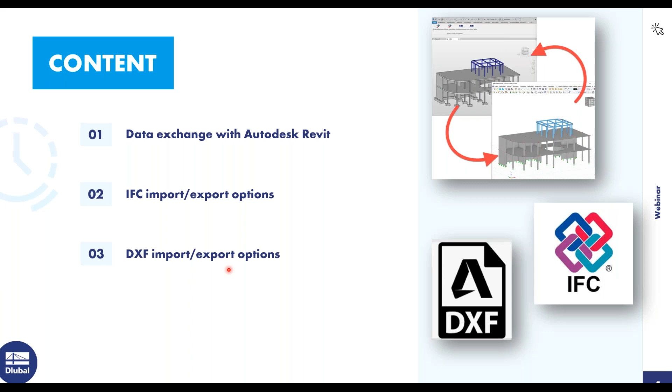So like I said, I would like to start with Revit, but before that, I want to have a closer look at the objects that you can transfer and just some general information on the integration.

Currently we have the interface for Revit 2022, and we're working on Revit 2023. This is planned to be released this month, actually. Both of these releases are set to be our named work in progress versions. What this means is that we haven't fully developed all the features that we want to have yet, but the most important features like import/export are working for the first release.

Currently, this link/transfer requires a web services license, and we plan to make this free in the future. For now, though, if you want to test this out, feel free to get into contact with us, and we will assign you a free web service license to test.

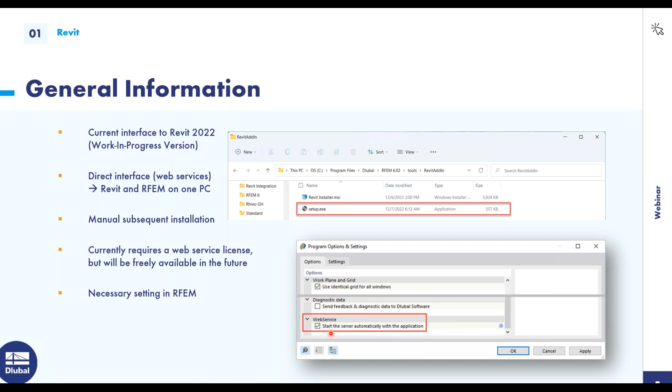At the moment, we are lacking or missing some features like loading. So loads we don't have at the moment - they cannot be transferred over yet, but they are under development and should be released soon.

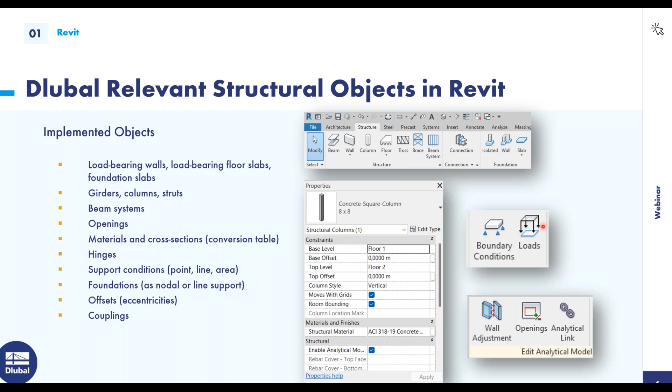Next, I wanted to go over the settings regarding the export. So we can go over those here in the PowerPoint.

Then we have some exporting options here. The first option is to create a new structure, which will create a whole new blank file in RFEM. You can also choose to overwrite an existing structure, which will completely delete the structure in RFEM and overwrite it with the structure from Revit.

Lastly, we have update existing structure, which will just update the items or objects that you've changed in Revit and RFEM. So for example, let's say you first export from Revit to RFEM, then modify the structure in RFEM, and at some point the Revit model gets updated. With this update existing structure option, you can simply update the RFEM model with no need to start all over in RFEM, and then you can save that.

Then there's an additional option: you can overwrite the member releases, but by default we have this turned off. The reason is because we believe the RFEM hinges or member releases have a higher priority. By default, we believe you don't want to overwrite these, simply because we have more options for hinges in RFEM, for example, nonlinearities.

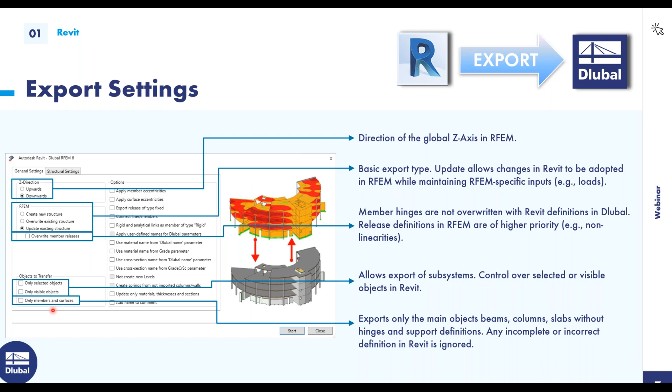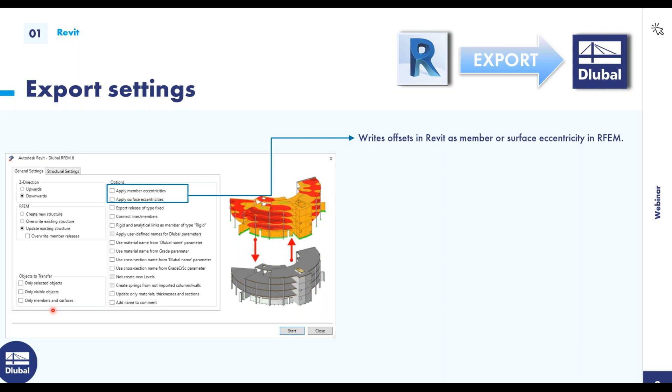Then some more additional options on the right-hand side here. You can choose to export member eccentricities or surface eccentricities. Eccentricities are some calculated distance between the analytical line of a beam or slab, and that distance is to the center of gravity of the physical object. So that's what an eccentricity would be in RFEM.

There are some additional options here that I'm not going to go over live today, but feel free to check out the PDF located in the handouts of this webinar or the recording online to read through these. The yellow highlighted options are still a work in progress and are not implemented yet. Then this add name to comment option - when you export, the material and cross-section names will be automatically placed in the comments of any element in RFEM.

Then there is a second tab called Structural Settings, and this is the last tab in the export settings. Basically what this does is it allows you to convert isolated foundations into nodal or line supports or surfaces with elastic foundations. So this will turn your isolated foundations or wall foundations into either nodal supports, line supports, or surfaces with elastic foundations.

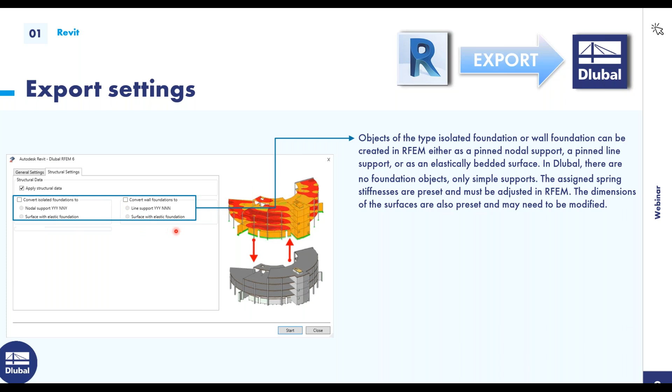Then the next topic is conversion tables. This is a topic that comes up with every exchange between software programs. Materials and section names must be converted between programs because the names don't match up exactly.

And then they are subdivided further by whether you're using regular expressions or not. In case you want to use regular expressions, just a little bit of information on these - regular expressions are like parametric conversions. So for example, instead of mentioning all sections from W shapes, you could write it as a regular expression, and then you don't have to list all of your W shapes. You could simply just write a regular expression for it.

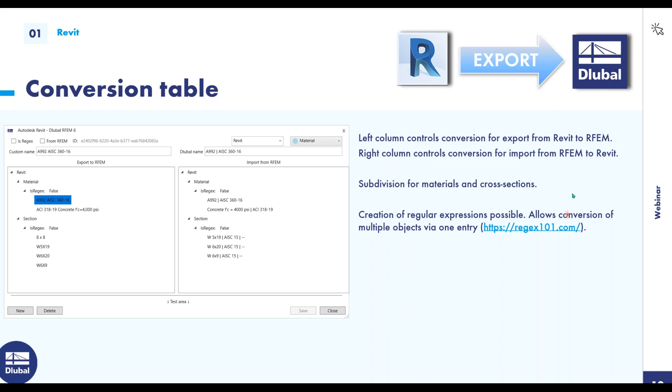The next topic is the Dlubal parameters found in Revit. With this function, you can release or add additional parameters into the analytical properties in Revit. From the 6 that we have listed previously, only 2 of these we have working at the moment. What you can do now is add a parameter for truss type or tension-only type member into the analytical properties of a column or a beam in Revit. This allows you to designate whether a column or beam is a truss or a tension member in Revit, so that during export this can be read by RFEM and assigned to the corresponding members.

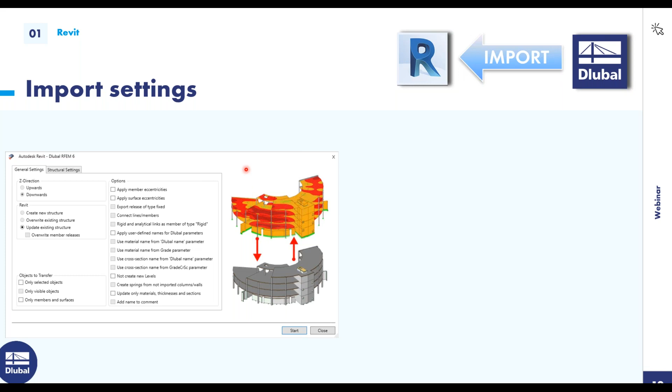The last topic I want to go over before getting into the interface is the import settings. This is the dialog box that'll pop up if you would like to import a model from RFEM into Revit, similar to the export settings dialog box. You can see here we have similar options. The only option available that isn't under the export options is the update existing structure option, so it's only possible to update a Revit project. You cannot overwrite or create a new project.

What this allows you to do is export into RFEM, modify a model in RFEM, and then update the Revit project. Another example is maybe you open an empty Revit project and want to read all the info in from RFEM or RSTAB, and you can do that by updating the project to get all the information from RFEM or RSTAB. Of course, this is only if you make sure you have the correct families preloaded into Revit, as we're not able to actually create new families when importing from RFEM.

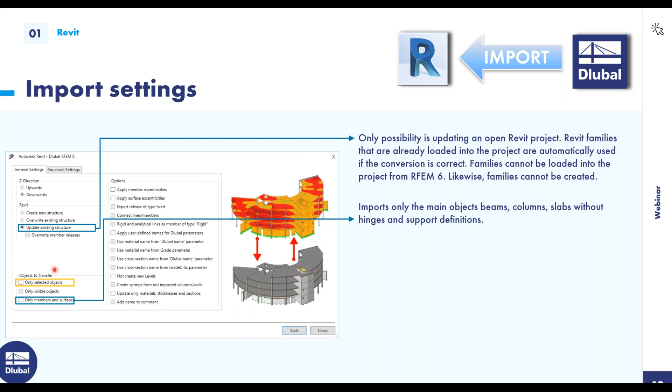There are also some functions for controlling the amount of transfer you do. This would allow you right now to transfer some of the objects. This is still a little bit under construction, but you do have the option to only transfer members and surfaces if you'd like. We have some other options still under construction too, such as the options for eccentricities shown here, which are not available yet.

We have 2 remaining options here. The first is you can check not to create new levels in Revit during the import, and that's available. Then you can also choose to only update materials, thicknesses, and sections. Sometimes this is a safer way of updating projects.

So that is it regarding the theoretical point of view of the interface. Now I'd like to take a look at the actual interface itself, so what we can do is move over to Revit.

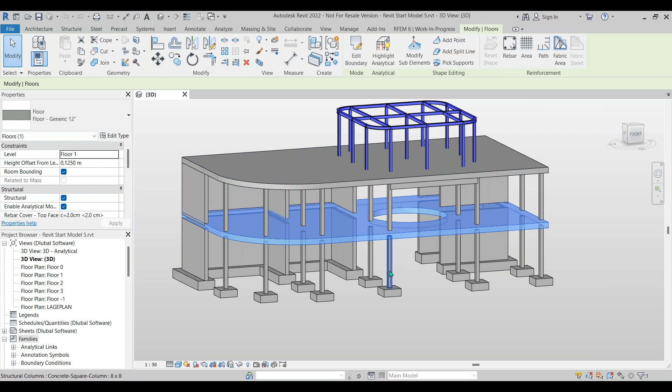Here you should see I have an example open in Revit at the moment. This is a project I previously put together. You can see it is a mixed structure of concrete and steel, maybe some small offices here. We have some concrete walls that are 8-inch, concrete slabs that are 12 inches along with an opening, and concrete columns that are 8 by 8. Then we have this smaller steel structure on top using W sections. So this is a physical representation of a project.

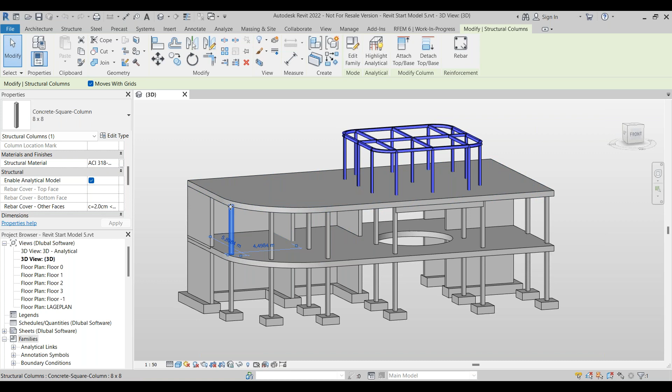What I'm more interested in is the analytical model, because that is what is going to be transferred into RFEM. You may be asking, how do I get this analytical model in Revit? You can get it by checking an option. If I click on one of my elements, say my concrete square column, you can go to the structural properties in this panel, and if you scroll down you'll find an option that says enable analytical model. If you activate this option, which I've done for all the elements here, Revit will convert the 3D objects into lines for columns and beams, and 2D objects for slabs.

So if I'm converting my column into a simple center line that goes up the center of gravity of the column, and then a 2D object for my slab here, which goes at the halfway point of the thickness, then naturally I'm going to have a gap appear between these two lines. So what Revit is doing is not only converting these objects into surfaces and lines, it's also connecting this gap afterwards.

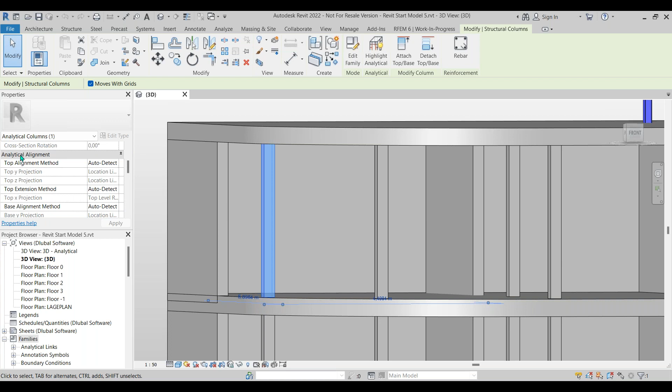If I click on my column here and change it to my analytical properties, and scroll down, you can see the analytical alignment settings are all set to auto detect. This is how Revit automatically detects that. There's also another option in the dropdown. If you hit projection, you can manually set a level for how much you want to shrink or elongate the member or column.

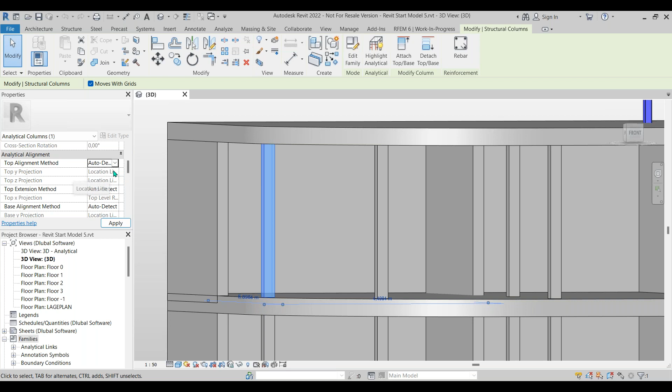This was all done for me already previously. So what I can do now is double click on the analytical 3D model. This is basically what our Revit does. You can see if I rotate the model that all of my columns are connected to my surface and they're all in the correct plane, so lines and surfaces are all connected in the same plane.

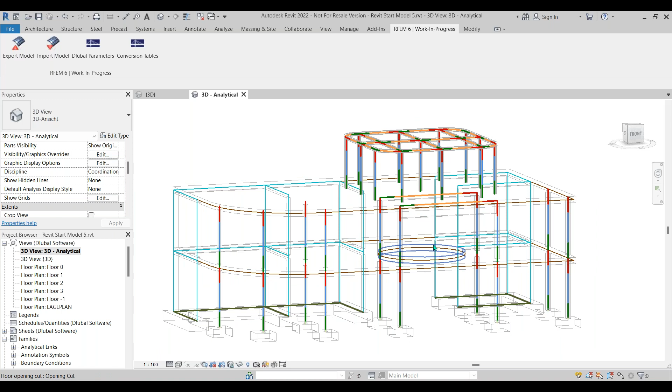My downstand beams are projected into the plane of the slab, which is required for RFEM. This is the model that's going to be exported to RFEM, and this is what the interface or plugin refers to.

If you installed the plugin correctly after installing Revit and RFEM, then you should see this tab up here called RFEM 6 Work in Progress, and that'll give you these four icons here.

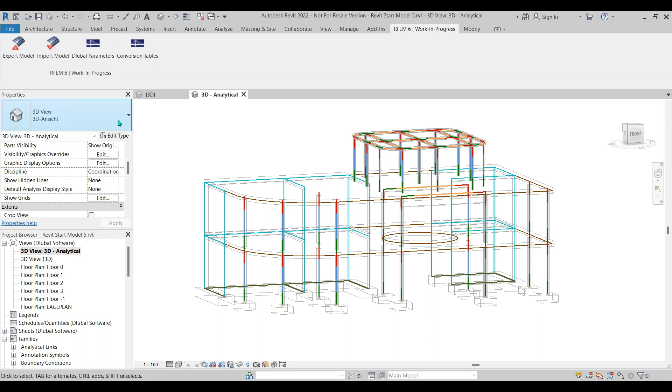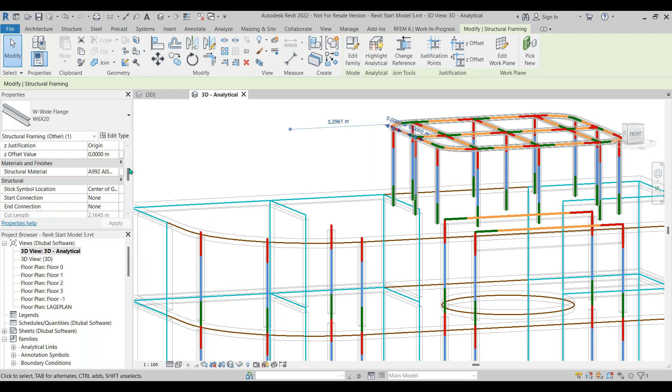Before running the export, I would like to check my conversion tables. Before doing that, let's look at some of the names I have for my objects. For example, I have a W wide flange here, and you can see the name is W6 by 20. I can also go into my properties, and I can see my material set under structural material. If I open up the material library, I'm using steel A992 according to the AISC 360-16.

So this is the naming convention that RFEM is not quite aware of. There are different, specific names used in RFEM. So what we have to make sure of, using the conversion tables, is that RFEM reads these names correctly. This is done in the conversion tables.

If I click on conversion tables, this is what I showed previously in the PowerPoint. On the left-hand side I have my materials and sections for exporting to RFEM, and on the right-hand side I have my materials and sections for importing in from RFEM. So you're maybe asking, how do I add a new entry?

To add a new entry, go down here and click the new button, then decide if the conversion is going to use regular expressions or not. I'm not going to use regular expressions, so I won't check this box. Then, is it related to the export? If so, I'm not going to click on from RFEM. Then hit this dropdown, and it's going to be part of Revit. Then decide if we're using a material or section - I'm going to choose material for now.

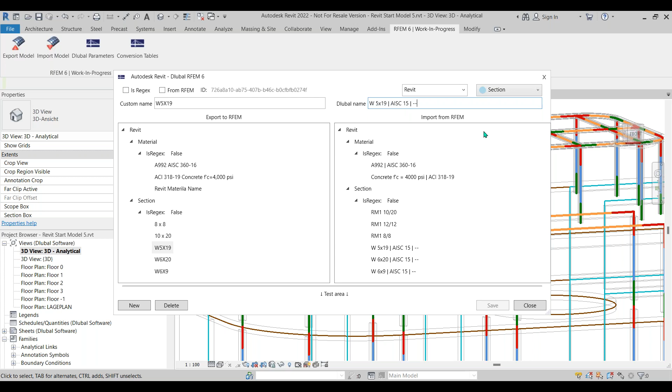And so now what we can do is run the export. I'm going to close the conversion table, and before exporting, we want to click on Export Model. Then you'll see the export settings dialog box pop up.

We can choose the Z direction, and I'm going to keep that as upward. Then I'm going to choose to overwrite an existing structure, as I have a blank model open currently in RFEM. I also want to choose to apply my member eccentricities, checked on, which is relevant for the downstand beams that are dropped below my concrete surfaces.

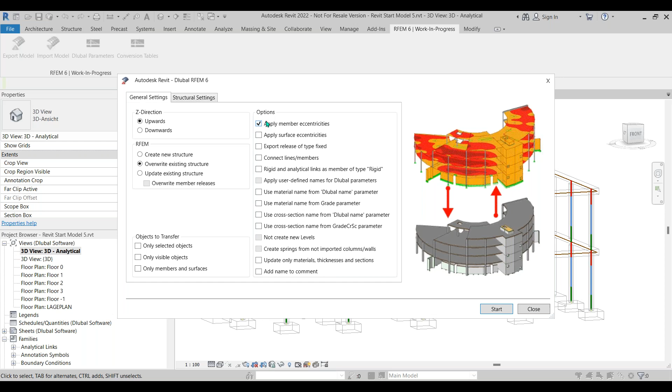Additionally, in the second structural settings tab, I want to convert my isolated foundations into nodal supports. These are the foundations under my columns. And I want to convert my wall foundations under my walls into line supports.

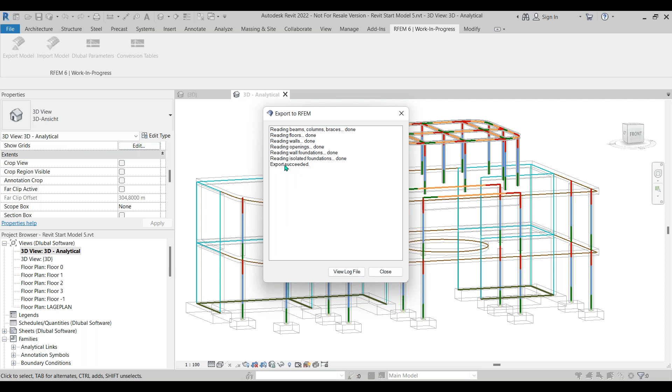Once that's done, I can click start, and then the export will begin. Revit will communicate with RFEM using web services and transfer directly all of the data into RFEM, and the transfer will end once the export says succeeded. So now we can close this box, and then I can switch back over and open up RFEM.

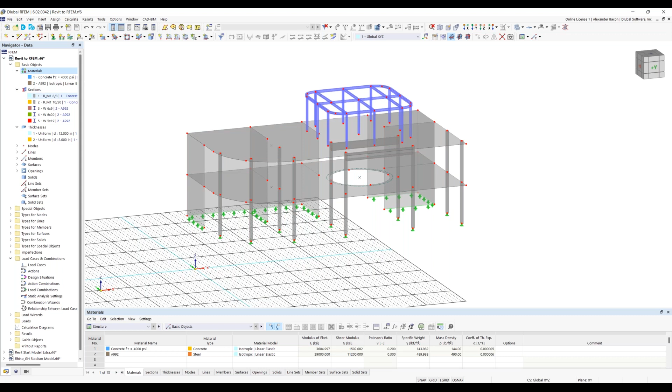So now you should see in RFEM the model that was exported over. It looks really good, you can see the model here. My concrete and material properties have transferred over, and I can look in the project navigator on the left-hand side under materials, sections, and thicknesses, and we can see all of my materials, sections, and thicknesses have all transferred over properly, which is good.

And now what we could do is continue modeling this structure by creating loads and load combinations on RFEM and designing the structure. But this is something I'm not going to show for today.

I will give an example of, let's say, maybe we have to modify the model here because some beams are missing at the top, or maybe we have to increase some sections because they don't meet the design. So let's say we have to add some beams up here. We're missing some beams, so if I hold Control and select all of my beams, I can use the drag and drop feature to move those beams over, and I can model my additional beams there.

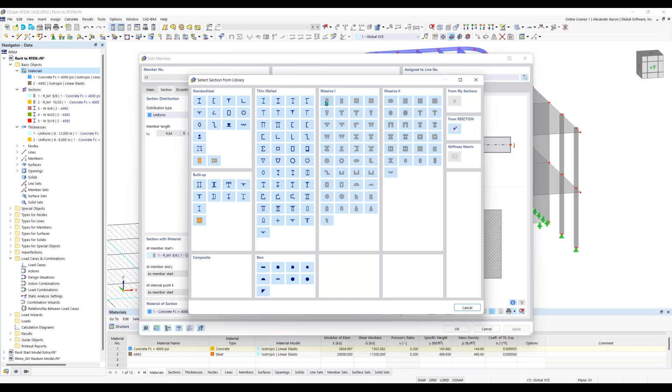Then let's say we have to increase the size of our columns. I'm just going to increase the size of this one by double clicking on it to edit it. Then I can go to section and open up our section library and create a new section. I'm going to choose massive rectangular.

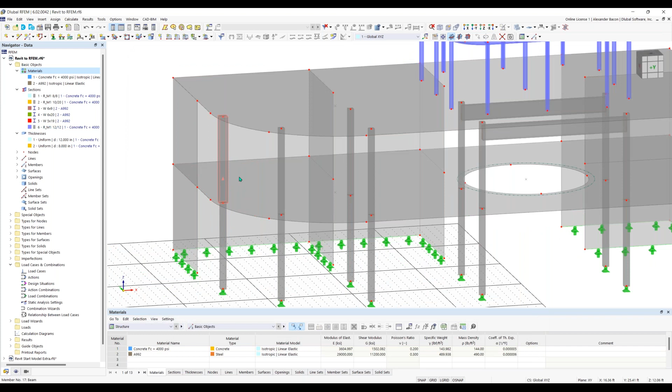Let's say we had to go from 8 by 8 to 12 by 12. I'm going to click OK and make sure my material is set to concrete f'c = 4,000 PSI according to the ACI, for example, and click OK. Now we increased the size of this section here and added some beams.

So now let's say we need to update the Revit structure. If I open Revit back up and need to update this structure, I can go back to the graphical view, then go to import model. Now we have to choose update existing structure. We can keep that applied, and then we can hit import or start.

Once that begins, sometimes you might have to assign the families again to some of the cross sections for RFEM. This won't be the case in the future because we will be optimizing this functionality, but for now, for my concrete columns, it's not assigning the families, so I can go in here and choose 8 by 8, and then we have our 12 by 12 here. I click apply, and that will be done automatically if the families are preloaded correctly in the future.

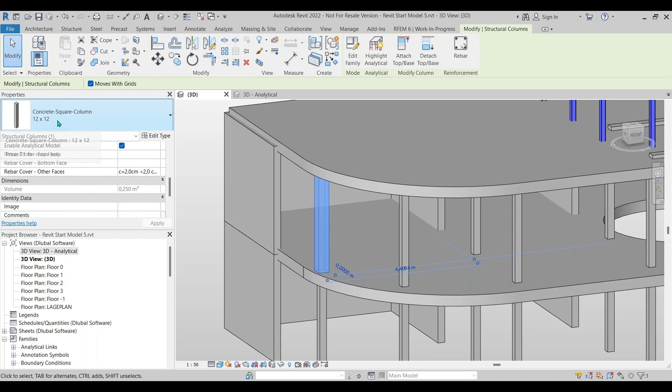Now we can see our new beams up here have been added to the structure, and also our column here, the section is updated to 12 by 12. So that is one way of importing. Another way of importing a model is maybe you just have a totally blank Revit file and you want to bring in everything from RFEM. This would be the exact same way.

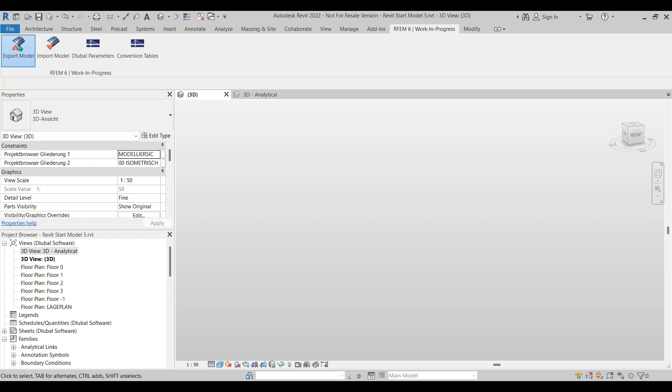You could import the model and choose all of the exact same options, hit start, and make sure all of the families are preloaded and all of your conversion tables are set up. Then you just have to sometimes select the corresponding families, hit apply, and then that import will go through, and RFEM will simply load all of the info into Revit.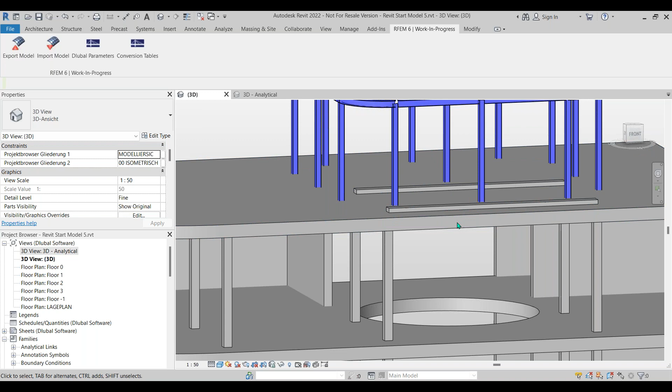So as I mentioned before, the eccentricities are not supported at the moment, as you can see when importing, but we are working on optimizing this and implementing it for the future. At the moment, the beams are just connecting to the bottom of our slab here.

Now I would like to switch back to the PowerPoint. So that's everything regarding the interface between Revit and RFEM. Now we can move into some general information on the data exchange for IFC formats.

Regarding the import for IFC, we support two versions: IFC 2x3 and IFC 4. IFC 4 is new in RFEM 6, and we can also import the structural analysis view along with the coordination or reference view. We also have an integrated IFC viewer, something we had in the past.

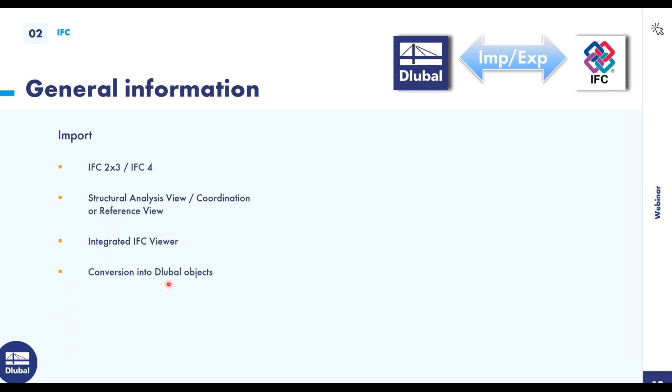This allows you to display the content in RFEM as graphical objects. And then lastly, we have the option to convert graphical objects into native Dlubal objects. For example, this may include an IFC beam being converted into an RFEM member, which is nice, pretty handy.

Regarding the export, at the moment we only support exporting IFC 4 from RFEM. We can export the structural analysis view along with the reference view, and this exporting of the reference view is actually something new in RFEM 6.

So now you can export your model into the common IFC format reference view, and that allows you to open the files in any CAD software, for example Revit, Tekla, or IFC viewers. In the past we only had the structural analysis view as an option. Now let's go over the workflow of this in RFEM.

I'm just going to open a new RFEM model, create a new model, and name this IFC format import. And I'm going to click OK.

I also wanted to open an IFC file that I had previously in BIMvision. This model was the same model that was in Revit, I just exported it as an IFC file, and it's basically the exact same thing. We have our steel structure on top, and made out of the remaining concrete structure on the bottom.

What's nice with IFC formats is you can take a look here on the right-hand side at all of the information regarding cross-section and material that's necessary for an analytical model, all transferred over. For this W-shaped column, we have a W5x19 along with the material, A992 steel. This is also done for the columns, slabs, and everything.

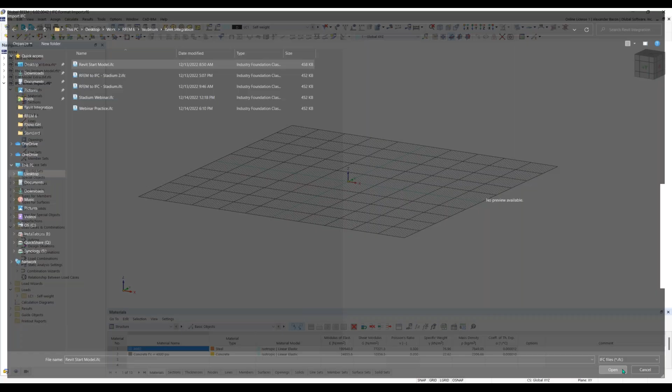So let's say we have this IFC model and we want to open or import this into RFEM and create a structural or analytical model. I'm going to open up RFEM, and once in RFEM with a new file created, you can go to File, Import, and choose IFC. Then we can simply choose the IFC file and click Open.

RFEM detects that it is a reference view automatically and activates the integrated IFC viewer, and this small dialog box will pop up. What this allows us to do is change the insert point of the IFC file, either by manually entering the X, Y, and Z coordinates for the global axes, or by choosing it graphically.

I'm just going to put it at the origin. You can also rotate the model about the axes here, along with being able to switch the coordinates or mirror them as well.

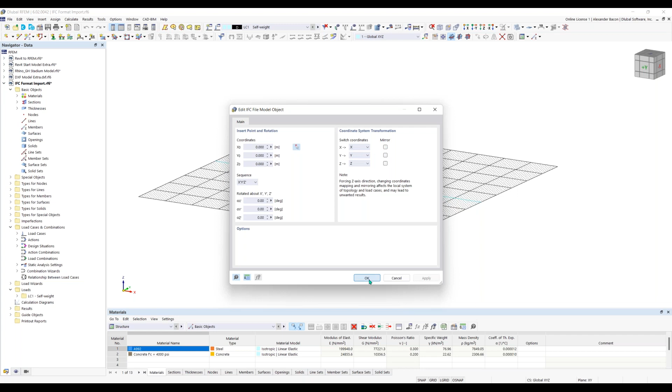Now, once we click OK, we can click OK again, and now we can see that my IFC model has been imported. I can turn off my grid here, and we're able to use the integrated IFC viewer. You can tell we're using the IFC viewer because now we have an additional IFC tab in the navigator on the left-hand side.

We're able to turn on and off the slabs here, so there are some visibility types automatically created. We can turn on and off the visibility of the columns along with the footings here.

So you have some options for visibilities, and then you can also get even further into detail with visibility by turning off specific objects. So you can turn off specific columns and beams.

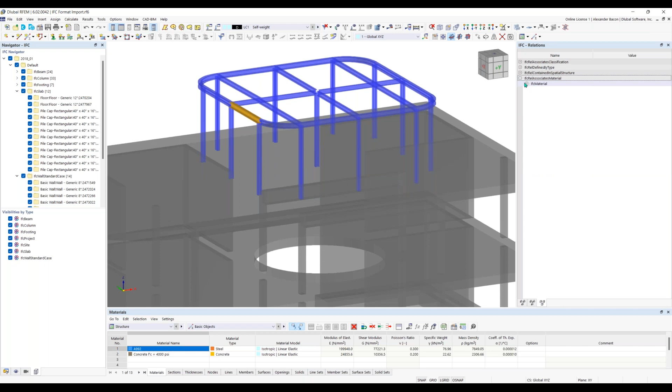Columns, and footings. And if we click on one of these objects, let's say we click on this beam, one of my steel beams, I can turn on my object properties. On the right-hand side, I'll get my basic IFC properties. What's nice is that the information for the analytical model was carried over from the IFC file. You can see I have my cross-section name here. And then if I go to my third tab, I can hit this dropdown and see that the material name has also been carried over.

So now we can use this model for the manual creation, if we want to, of our nodes and lines. That's the first method.

And what we can do is use what's called object snap, which is built into RFEM. If we right click on OSnap down here, we have our object snap settings. With these turned on, we can basically draw our center lines and our members on our structure here.

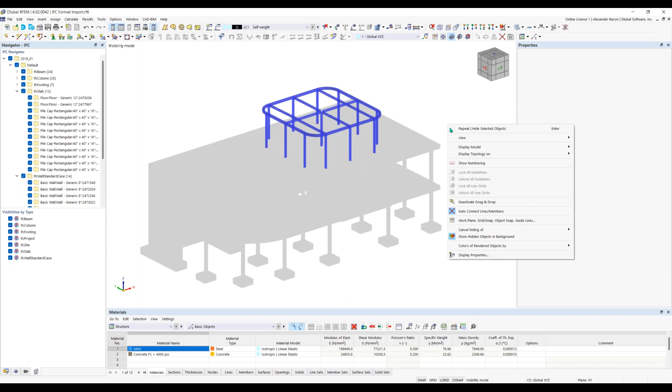So I'm just going to do a small portion of the structure for an example. I'm going to highlight the bottom portion here and hide these selected objects. Then I'm going to turn off the hidden objects in the background. Let's just focus on the steel portion here. Let's say we want to model this steel portion.

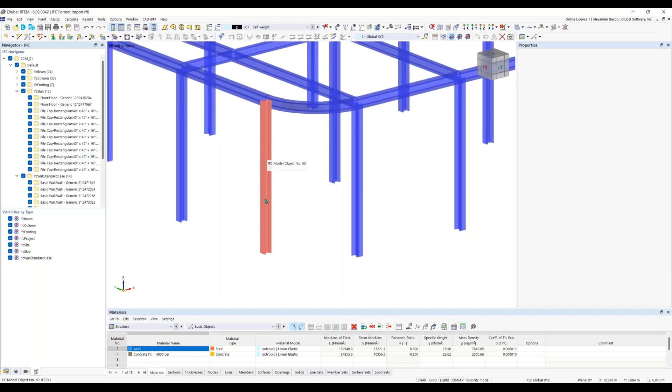The first option would be if we just use this column for an example. We want to model this column. Right now it's just an IFC object, but we want to convert it into a Dlubal or RFEM member. So we can turn this into a wireframe view here.

And then what we would need to do is use the tool up here to create some nodes at the center of gravity of this column so that we can draw our line. We want to use the tool between 2 points. Once that tool pops up, I can simply snap to one corner of my column or cross section and then the other one and click apply. Now we have a node placed at the center of gravity of this column.

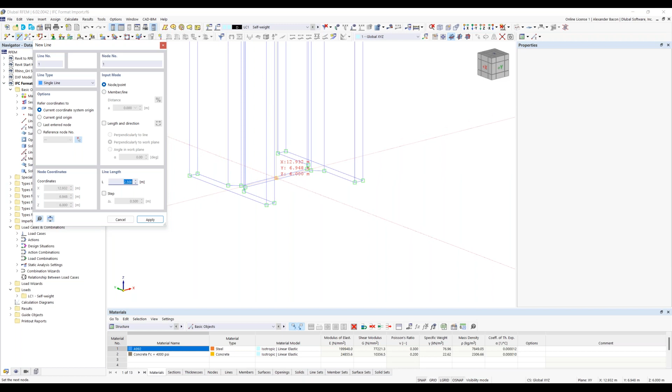And then we would want to do this for the top as well. Click apply. And then we would want to connect these nodes here with a line. So I can select my node here at the center, and then snap to the bottom here, right click to cancel out. Now we have our analytical center line for this column.

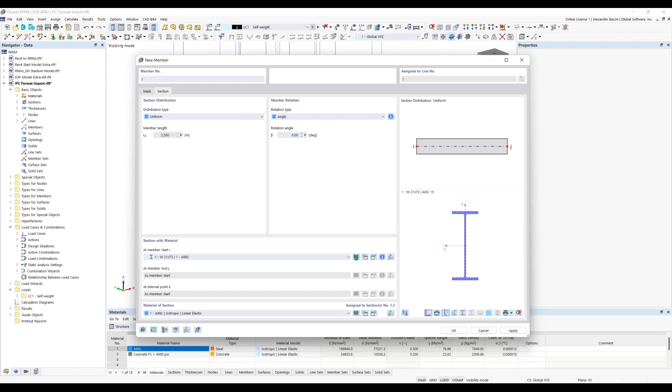I would want to double click on this line, go to member, and then under member here, I can create a new member, go to section, and assign a cross section and a material to this line. I can import this from our section library.

So I would want to open up the section library. We have our standardized sections here, our W shapes, so I can choose those. I filter to the AISC 15, go to W shapes, and this specific W shape is a 6 by 20. I'll scroll down to 6 by 20, and then I can choose the material, say steel A992.

You can get any material from the material library here. Click OK, click OK again and again. Now if I change this to a solid view, you can see that my column here is created, and I can use this for my analytical model.

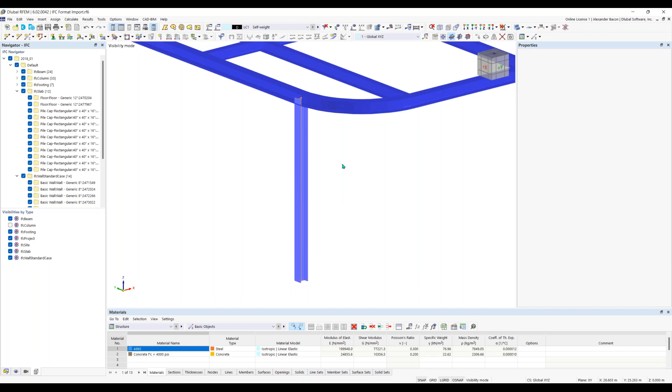So that's one way this is how you can turn IFC objects into RFEM objects, and it might be a lot of manual work, but for this file you could definitely do it depending on the size of your file. So that's one way of turning your IFC reference view file into an analytical file in RFEM.

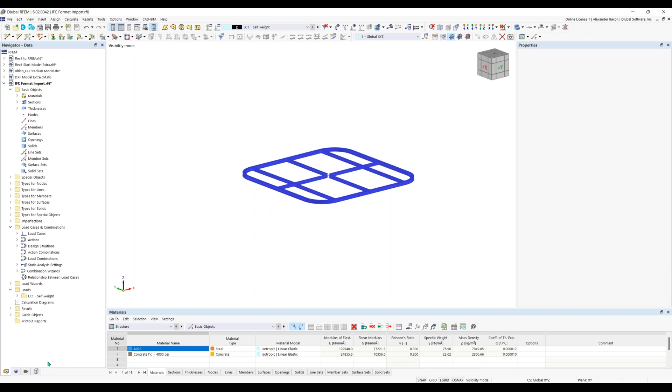There is another method that you can do. If you right click on an IFC object, you'll see that there are a couple of options for converting it. You can convert it either into a straight member, a curved member, or convert it into a surface or solid.

Before you do this, you should check your conversion tables in RFEM. If we go up here to the CAD BIM menu, we can open our conversion tables. And so we have a conversion table in RFEM. Here you can see my materials tab.

When you import an IFC file, we try to insert the material and section names into these tables automatically. So all of these names and sections from the IFC file will be inserted automatically on the left-hand side. But what you have to do is make sure to assign the correct Dlubal material.

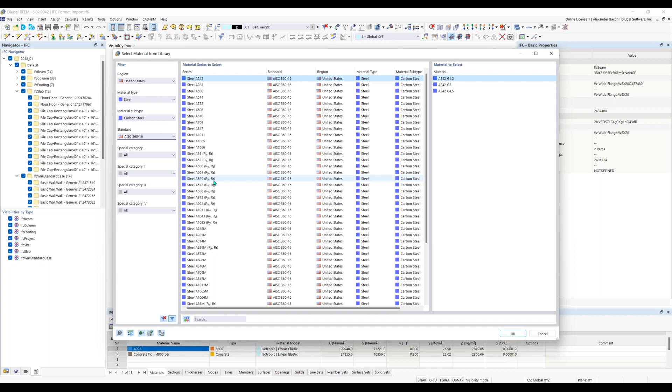It's very easy. I already did this for my materials, but you can simply click on this edit material button, then filter to the material you'd like. For example, this was steel A992, so we'd filter to steel A992, click OK, and that material name will be inserted here automatically. I'll do this for my sections.

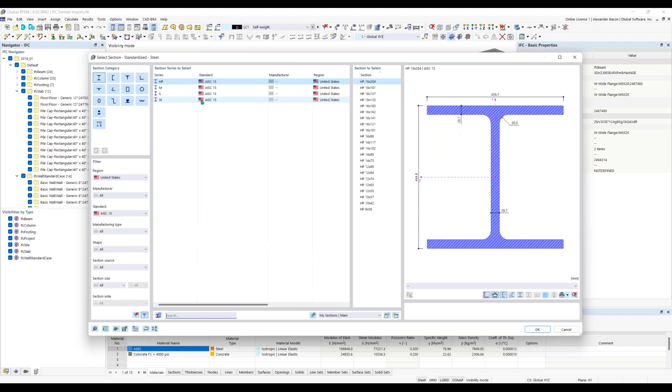All I need to do is my wide flanges, my W shapes here were entered automatically for me. So I have my W 6x9 here, and I'd just click on this button, go to my W shapes, scroll all the way down to my 6x9s, and click OK. Then you can see the correct name has been entered.

Then I can simply hit F8 for the cell below. We can hit the next cell, hit F8 again, and fill out these rows. For these, instead of going through the section library, we can simply edit them. So I can change this to 5x19, like that. Now we have our cross sections entered for the steel structure behind this window.

I can click OK, and now we can convert our objects here properly. You can do this for one single member, so I can right click on this member and convert it into a straight member. Now you can see it's converted.

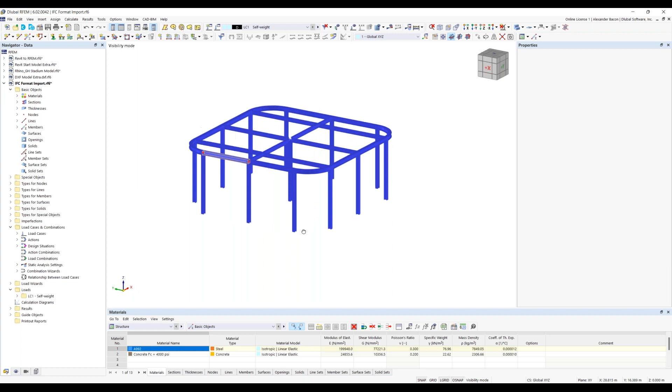Or what you can do is highlight multiple members. If I hold Control, I can highlight all of my straight members first, like so, getting all my columns. Then I can right click, go to IFC model object, and convert into straight members. Once you do that, if you go to edit them, you'll see the cross sections have been assigned to the member along with the material.

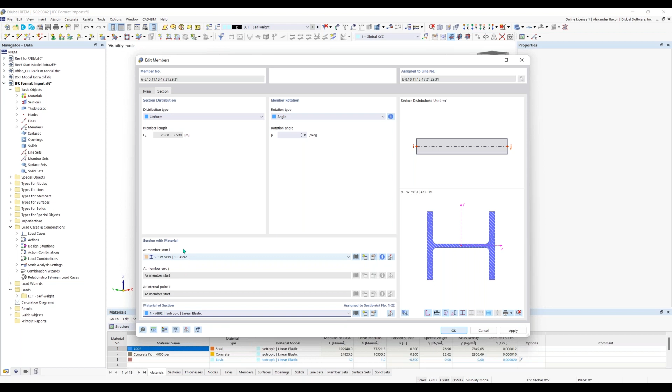So we have steel A992 and the correct sections. If I click OK, the last thing we need to do is the same for our curved members. I can go around here holding Control, selecting my curved members, right clicking on them and converting them into curved members.

So yeah, this looks great at first. But what we want to do is check the wireframe. If I turn this into a wireframe view, unfortunately you can see that a lot of the nodes are not actually connected here. The reason for this is that there are gaps between the beam, as the beam is going to end at the flange.

This is basically because of the conversion from the IFC file. If we go back to BIM Vision and zoom in, you can see that the beam ends at the flange of the column here. So unfortunately, our analytical model is also going to follow this same layout. This is something the user has to do manually, to connect these back. We don't have any autonomous features that can connect these lines afterwards, but this is doable, at least for this model, and we do have some tools that can help with this.

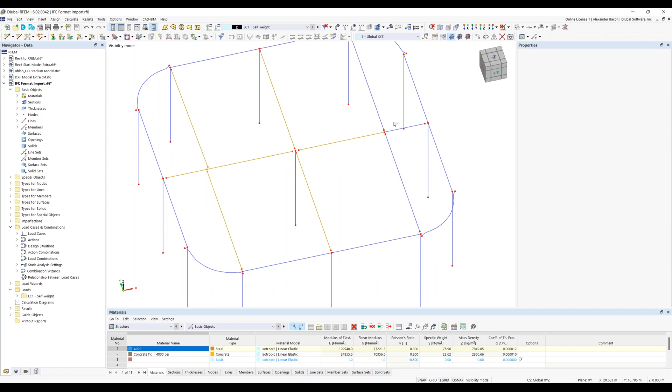Right click on them, go to members, and one of the really nice tools to get these all connected again is if we choose the extend member option, and under extend through, we hit to next member/line. We click OK, and now all of our lines here are connected.

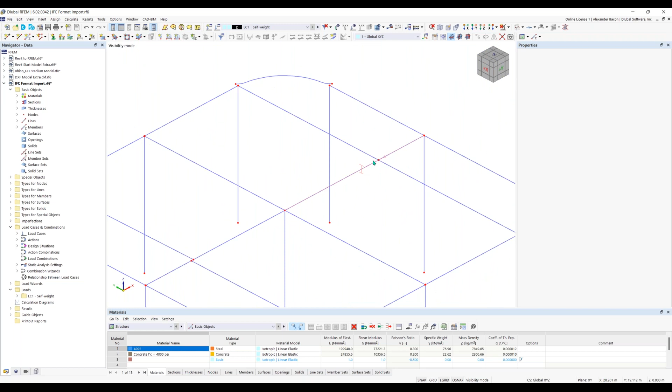So all of our beams here have been connected. You can see they're all connected. Then we would simply go around to our corners here and use our drag and drop feature to connect our curved members here, like so.

And we'd also want to make sure that our surrounding girders here are connected to our columns. So there's just a little bit of cleanup work when it comes to that type of conversion for IFC. You would have to do this for the remaining 4 corners here, and also our beams on the outside. But after doing this, you'll have a clean converted IFC file.

And so this is something you're going to have to do if you don't want those eccentricities. It's a bit of manual work, like I said, but you get an analytical model out of an IFC file. And so that's how importing IFC files works and how you can get an analytical file.

One thing to mention, we are possibly collaborating with another software company to automatically get these analytical models and optimize this conversion further. This is still in development, but we plan on sharing more information as soon as that's ready. So now let's talk about exporting IFC files.

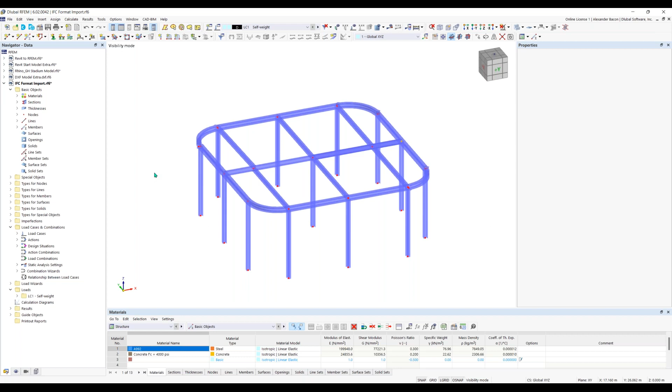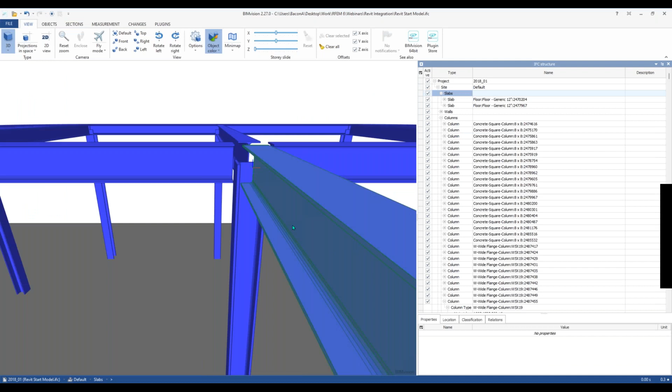When you want to export this file, you can go to File, Export, and choose IFC. Then you can save this file as anything you'd like. Down here in the right-hand corner, you can choose to export this file as an IFC file, and export.

If you choose IFC, you can give it a name, and then choose between a type here. You can export it either as a reference view, which is new in RFEM 6, or you can export it out as a structural analysis view.

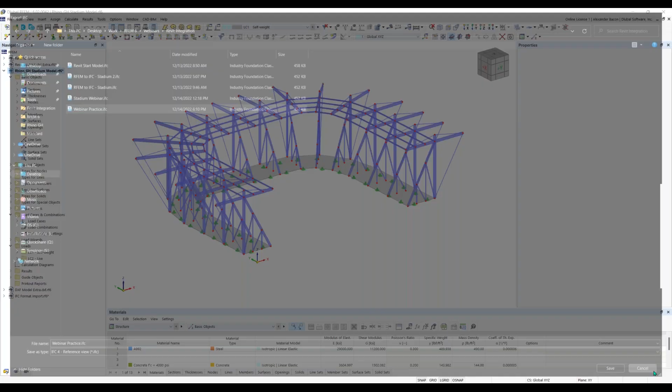Once you do that and save the file, you are able to open it in any BIM viewer like Tekla or Revit, and you can get all of the content and info from RFEM.

So if I go back to my BIM viewer here, all of the info from Revit or from RFEM has been exported. So if I click on my column here, for example, we can see the column on the right-hand side, and we can see the correct beam here was opened up.

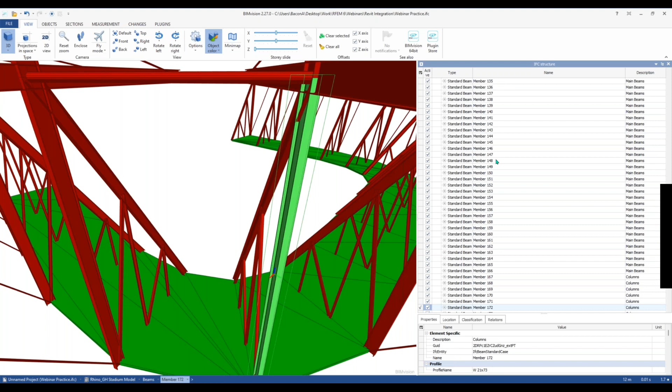Let's see, if I click on one, you can see I have my material here along with the cross-section name at the bottom here. So you'll get all of the analytical properties that you need, material and cross-section, inside of the IFC file.

That's basically how you can export an IFC file, and like I said, you get all of the required info for an analytical model.

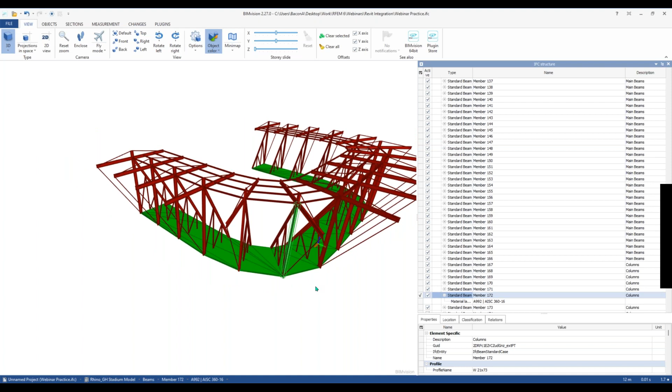So now let's go back to the PowerPoint, as I would like to now move into the last section of this webinar, and that is all about the DXF template or format.

And so before going into the actual interface or going into the steps on how to import or export a DXF file, I would like to just go over again, lastly, some general information on DXF.

So there's two options for importing a DXF file. You can either use the direct import for AutoCAD, or you can just import the DXF file itself. These both have the same functions.

And then there's also an option for importing specific layers. This is something that RFEM 5 had, but now we have optimized it. So what you can do is now select multiple layers. In the past, you could only select one layer.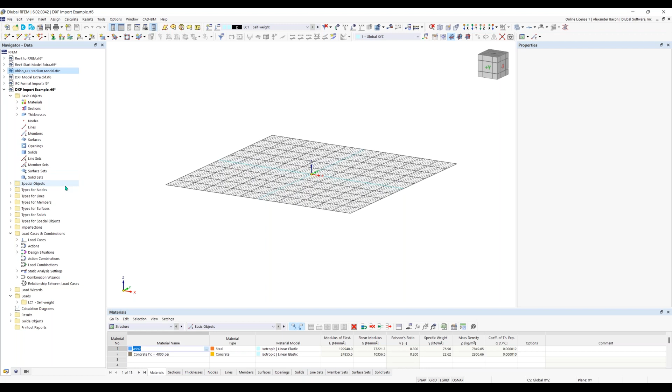First I would like to show you how to import a background layer from a DXF file. This has changed a little bit. We can import this using guide objects, which are found in the navigator on the left-hand side. We want to go down to the folder Guide Objects, and then you can find the background layers.

We want to right-click on background layers and choose new background layer. Once that opens up, you'll see this dialog box, and the first thing we want to do is import our DXF file. I'll click on that button, locate my DXF file locally on my computer, and hit open.

There are some additional settings here. I'd like to point out the insertion point - this is the point at which the model will be sitting on the origin, so that will be the center. There are some other options here.

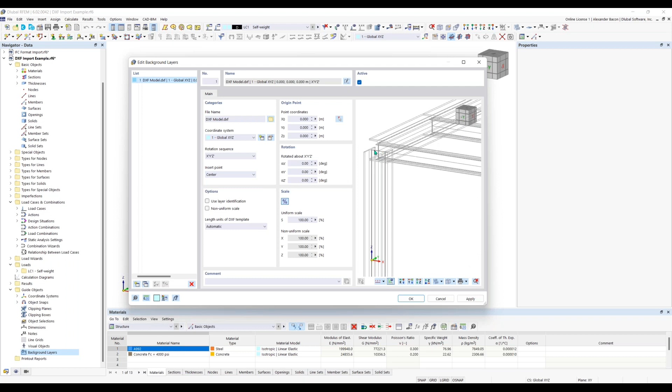We would like to optimize this a little bit further and improve on it. At some point you can just snap to a point on the DXF file here in the graphical view, and that will be your insertion point. Hopefully that'll be in there graphically soon. Then you can choose your origin point in RFEM - you can enter this manually, or use this button to choose it graphically.

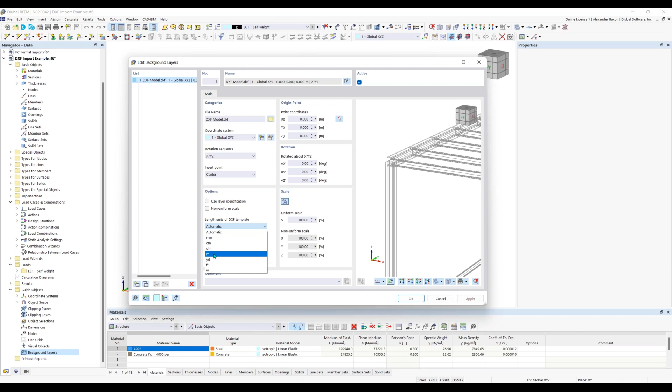Then there are some scaling options here, and second to last, you can choose your units. You can set this to automatic, or if you know the units, you can choose them. I'm going to choose metric, as this model was originally modeled in metric.

At the top here, you can activate or deactivate background layers. This is helpful if you have something like a multi-story building with multiple background layers listed here, and you want to deactivate or activate them.

Now we can use these background layers to model this - similar logic to the IFC file I showed. I'll just do an example real quick. We can draw a line, a center line again. I'm going to use this column again as an example, so I can zoom in here.

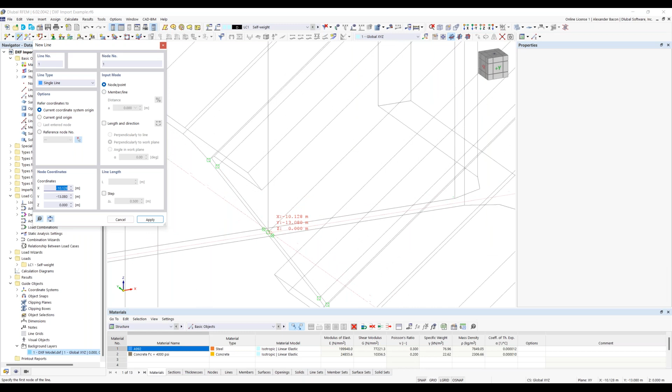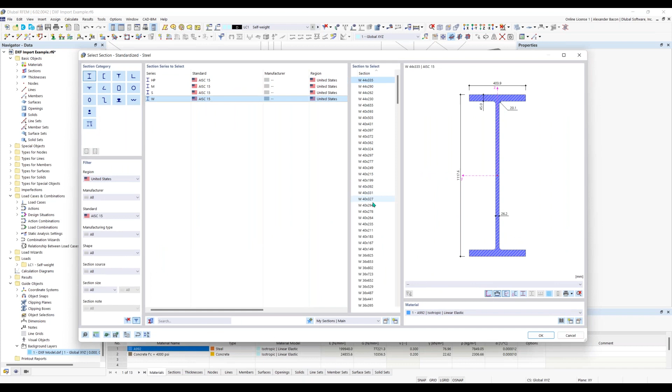I can snap to this point if you have your object snap settings turned on, then go to the top here and snap to this point, right click, and then double click on the center line, check the member option to turn this line into a member, go to section, and then quickly go to W shapes, scroll down, and this will be an 8x35.

Click OK. I have steel A992 assigned. I can click OK again and again, and now you can see I have my W shape here created.

So this is one method for modeling in a background layer - you can just add in the center lines and then assign the corresponding cross-section and material. That's one way. Another method is to import these lines directly. I'm going to clear this out and show you how to import the lines directly.

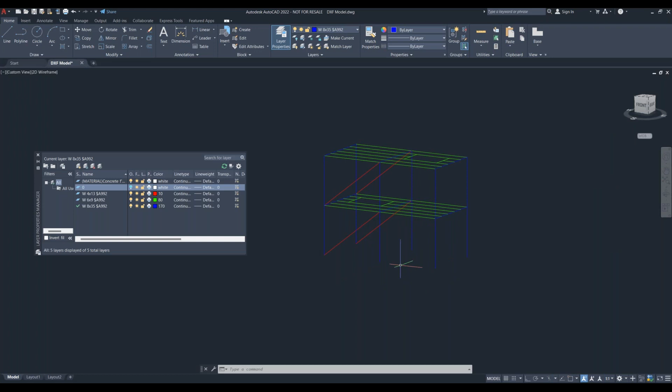To do this, I'm going to open up AutoCAD. And in AutoCAD, you can see here I have my exact model here, with my member lines, the outlines of my members here.

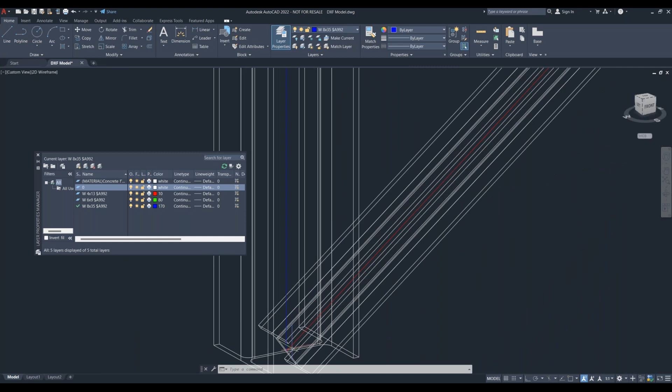Then what I've done was drawn in the analytical lines at the center of all of my members here, and depending on the cross section, I made multiple property layers for each cross section. So here my red cross sections or red lines are corresponding to my red layer, and those are my W4x13s with the material here.

You can see the layer description - this is the exact format you have to type your cross section name in, with your materials. First it's the cross section, then a space, then a dollar sign, and then the material name. This is very important - your description has to be in this exact format for RFEM to be able to read it and extract that information correctly when importing.

Once you have all your layers set up properly like this, you can go back to RFEM. I'm going to delete my background layer here, go to File, then Import, and choose AutoCAD or DXF. I'm going to choose DXF, then choose my DXF file and hit Open.

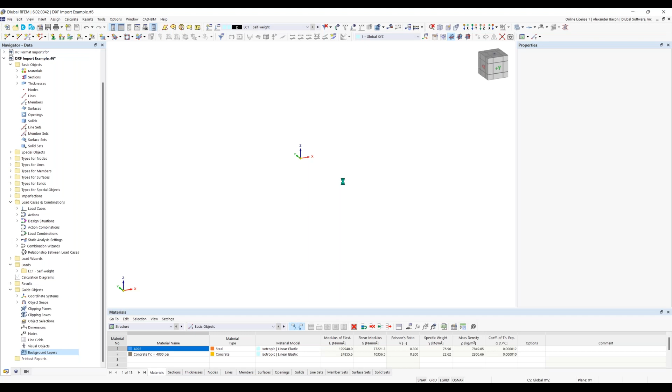Once I hit Open, this dialog box will pop up. Again, you can choose the origin point or rotate the model. You can flip or switch around or mirror the axes. The most important option to check is to generate our members and use layer identification.

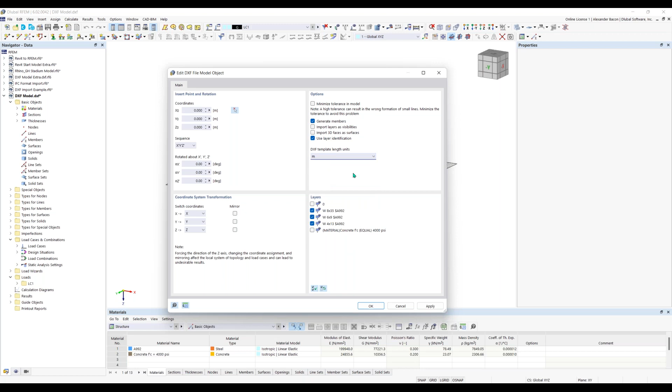With these options turned on, instead of just generating the lines, I can also generate the sections and materials based on the layer description. Now you can see those layer descriptions down here. I want to check off my member outlines in this layer, and then also change my units here. Once I click OK, my conversion tables will pop up.

Once I click OK again, you'll see that I have imported the model and it looks really good. I can also check and make sure all of my sections were imported properly. I have all of my correct W-shaped sections here.

So this is another method for importing a DXF file and modeling it in RFEM. This isn't suitable for everyone. Since you have to create the analytical lines in AutoCAD, if you haven't already done that, it might be a lot of work, and maybe you're better off modeling them in RFEM directly.

But it might be helpful for companies that use blocks in AutoCAD, maybe using very similar structures, the same type of structure all the time. If your blocks already have the analytical lines modeled, this could be a really easy solution for you.

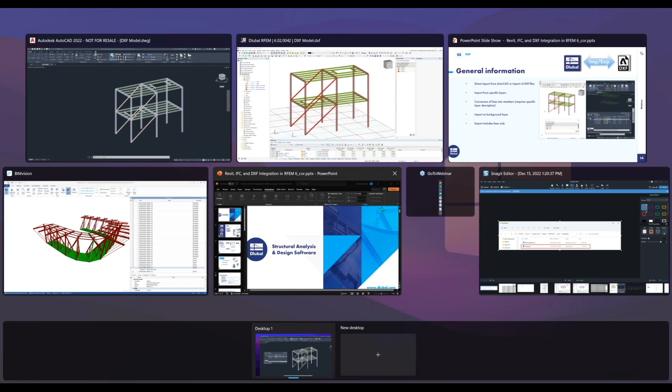So that is all I wanted to go over for today's webinar regarding the interfaces between Revit and IFC and DXF. Now I would like to hand it back over to Amy to conclude the webinar.